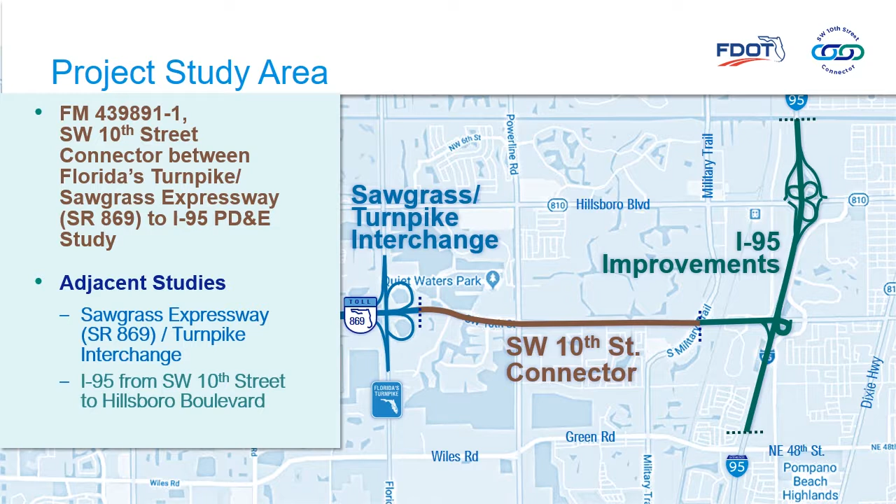The Southwest 10th Street Connector study is located between Florida's Turnpike and I-95. There are two adjacent studies that include I-95 from Southwest 10th Street to Hillsboro Boulevard and the Sawgrass Expressway and Turnpike interchange. The Broward Metropolitan Planning Organization, or MPO, formed a Community Oversight Advisory Team, or COAT, to provide recommendations for the project study area. Recommendations such as safety, improved operations, and environmental considerations have been incorporated into the project's purpose and needs statement, and all recommendations are being fully evaluated during the study.

The purpose and need for the Southwest 10th Street Connector is comprehensive and includes many of the COAT's recommendations. Providing a limited access managed lane connector facility along the corridor between the Sawgrass Expressway and I-95 will improve system connectivity between Strategic Intermodal System, or SIS, facilities. I-95, Florida's Turnpike, and Southwest 10th Street are all SIS facilities. SIS facilities are those that are critical to statewide mobility and economic development.

Local transportation needs for Southwest 10th Street will be addressed, including the application of complete streets concepts. Safety and operational issues will also be addressed along the corridor and will improve emergency response and evacuation times, since I-95, Southwest 10th Street, and Florida's Turnpike are all designated evacuation routes. This project will also encourage intermodal relationships and economic development for the area. Next is a short video about the Southwest 10th Street Connector.

I've lived in Deerfield Beach for 15 years. Feels like nice Florida. Great beaches, great food, great atmosphere. It's easy to get to Miami, it's easy to get to West Palm Beach. Everything we could think of is located conveniently within the city. We love it here, and we wouldn't consider living anywhere else. But the traffic on Southwest 10th Street has always been a bit of a challenge, and more recently we've noticed more traffic in non-peak hours.

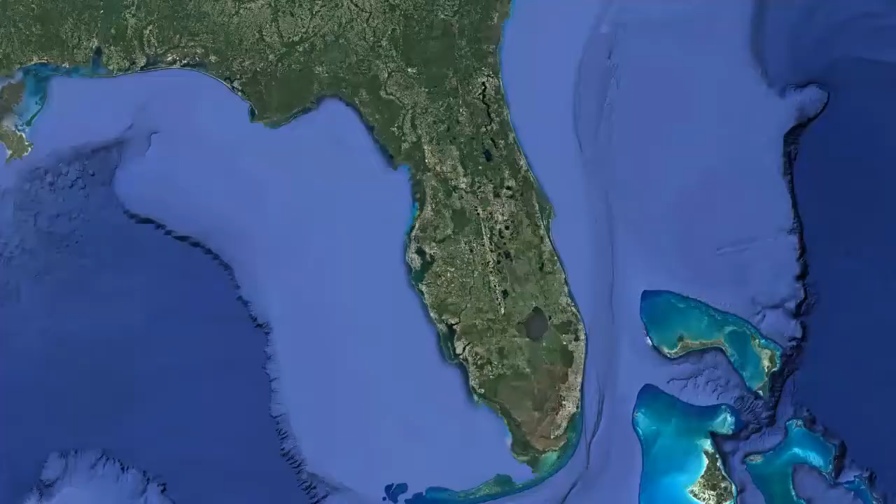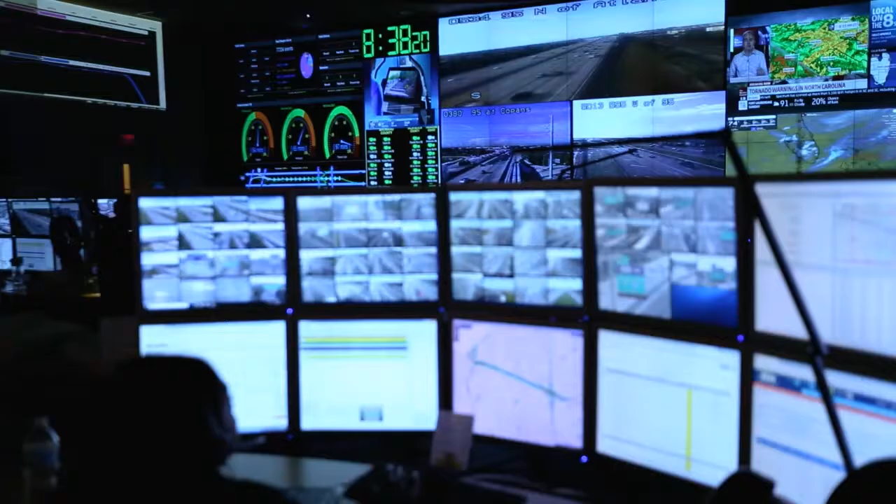The goal with Southwest 10th Street is to improve the connection to I-95, as well as provide a regional connection through a managed lane system to the Turnpike and the Sawgrass. In addition to those improvements, we will provide a new complete street local facility, which will provide bicycle, pedestrian, as well as vehicular mobility. Improvements to the corridor would allow us to actively monitor the roadway to be able to communicate with first responders and to let them know what is needed, and we can send the proper resources out to mitigate incidents that occur.

By providing the managed lane system, we are significantly reducing the number of vehicles using the local Southwest 10th Street, which will reduce the travel time for those who are using the local facility, provide you a quicker time to get to your home and or business that you're visiting. If we want to keep growing and sustain that growth, we need to plan down the road and allow for this growth to happen. The connector will help our area as well in the fact that now people won't avoid 10th Street for fear of the traffic.

The end result will better my commute and better my experience with the road. 10th Street will now be a connector that people can get on and go to our local businesses and actually not have to worry about being stuck in traffic. Helping the local neighborhood and local residents, that is something to be excited about. It's a great opportunity for us to take advantage of working with our partners to solve our congestion problems today and into the future.

The Southwest 10th Street corridor represents a gap in the regional managed lanes network. This corridor is an important SIS link between the Turnpike and I-95. The Turnpike and I-95 are the backbones to the north-south movement for people and goods throughout the state of Florida.

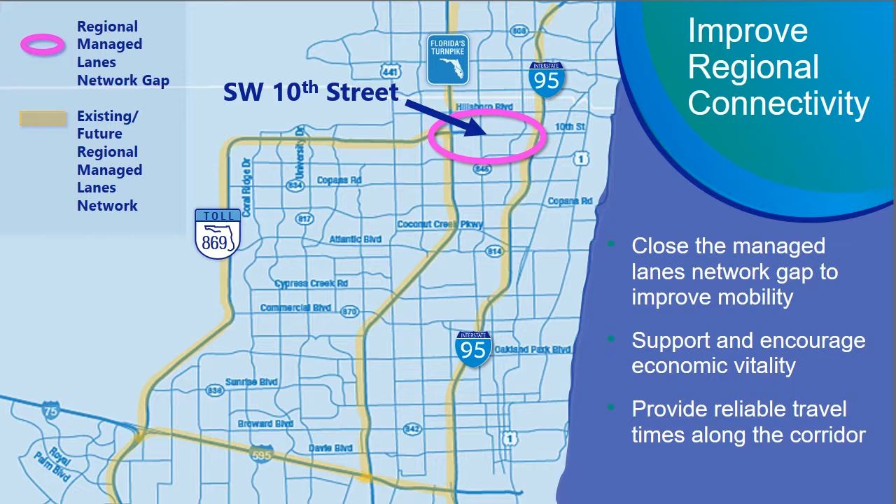Implementation of a managed lanes connector roadway, along with an improved local roadway for Southwest 10th Street, addresses COAT recommendations and will complete the regional network and promote mobility and economic vitality of the area. An improved local Southwest 10th Street will retain access to communities and businesses. Complete Streets elements will be incorporated in the design of the local roadway, including bicycle and pedestrian features, a lower speed, and landscape aesthetics features.

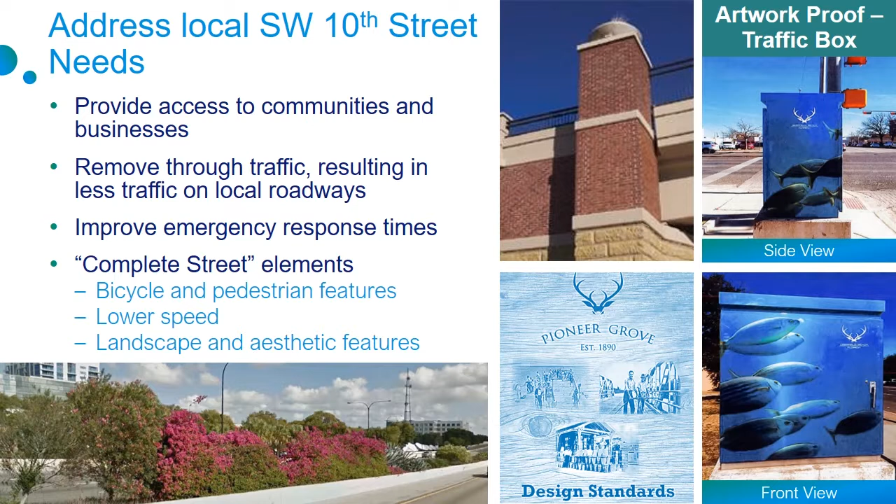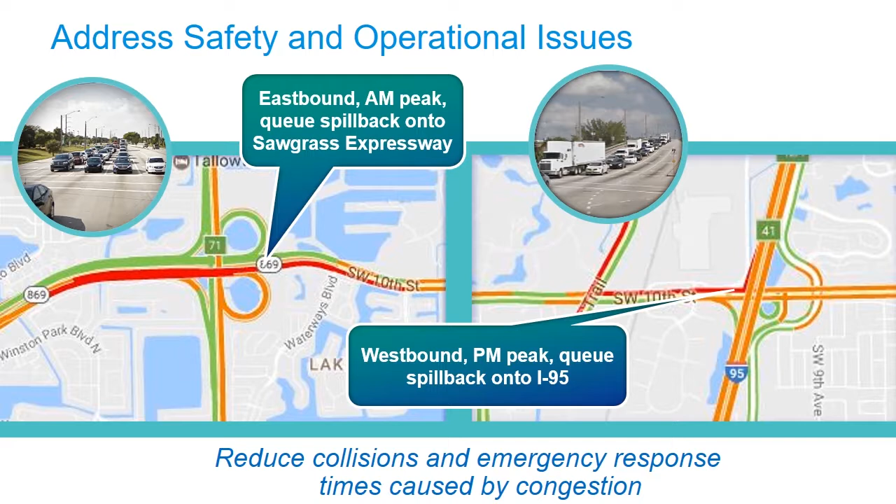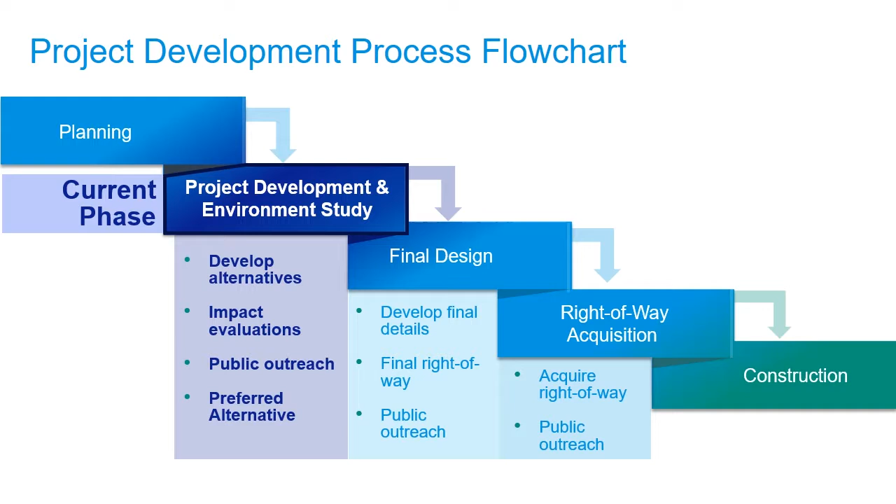Both the Southwest 10th Street and I-95 corridors experience heavy congestion, which contributes to a higher than normal crash rate, as well as delayed emergency response times. The overall transportation project development process is shown here. We're in the PD&E phase shown in the second tier. In the PD&E phase, engineering design alternatives are being developed. Community outreach and agency coordination are occurring along with evaluations of environmental and community impacts. At the end of the PD&E process, the FDOT will recommend a preferred alternative.

The PD&E process follows several steps. We're currently conducting the engineering and environmental analyses, holding the alternatives public workshop, and preparing draft documents. During the engineering analyses, alternatives are developed to meet the purpose and need of the project. Potential impacts to the corridor's social, natural, and physical environments are being studied and documented. A continuous community outreach process is integrated into every step of the process to ensure that residents, businesses, and other stakeholders have opportunities for participation and meaningful input throughout the PD&E study.

All design alternatives have been developed and refined throughout the study process to meet the project's purpose and need and avoid or minimize impacts to the community, natural, and physical environments while incorporating as many COAT recommendations as possible. The alternatives are being compared to each other in an evaluation matrix using common criteria such as community and environmental impacts, traffic operations, and others to determine which alternative has the least impacts overall while providing the most long-term benefits for the stakeholders. As part of any PD&E study, a no-build alternative is always carried forward and included in the matrix. The matrix is included in the project exhibits.

The team is evaluating 2 facilities within the Southwest 10th Street corridor. One will be a managed lane facility to provide a connection between the Turnpike, Sawgrass Expressway, and I-95. Concepts will be evaluated with different entrance and exit ramp locations between Powerline Road and Military Trail for access to and from the managed lanes and local Southwest 10th Street. The extent of the below-grade section is being evaluated for the managed lane facility and will continue to be developed as the study progresses. The other facility will be a local, lower-speed roadway to serve businesses and communities within the corridor. Bicycle lanes, sidewalks, and other community elements will be included.

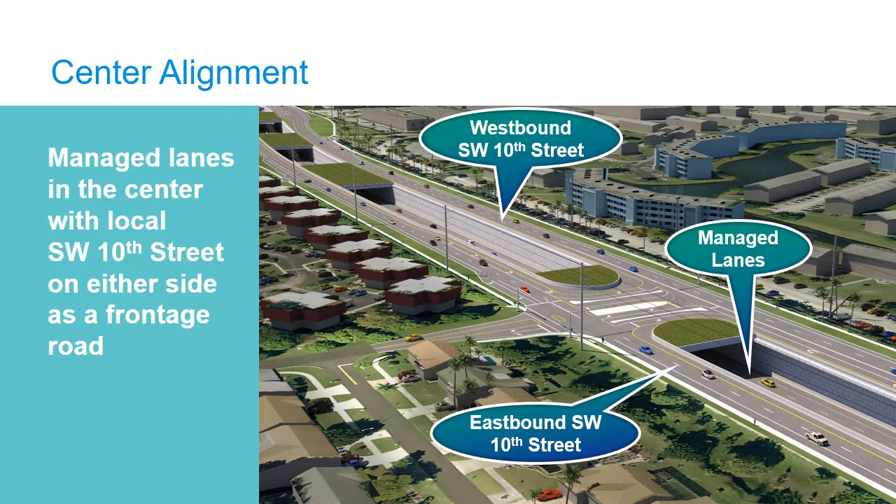In April of this year, the first Alternatives Public Workshop was held. A center alignment and a north alignment were presented. The center alignment presented in April is shown here. The managed lanes are in the center, with the local Southwest 10th Street on either side as a frontage road. This is the north alignment, which places the local lanes in the north side of the corridor and the managed lanes in the south. Based on feedback from the April Alternatives Public Workshop, community and stakeholder meetings, the north alignment was favored.

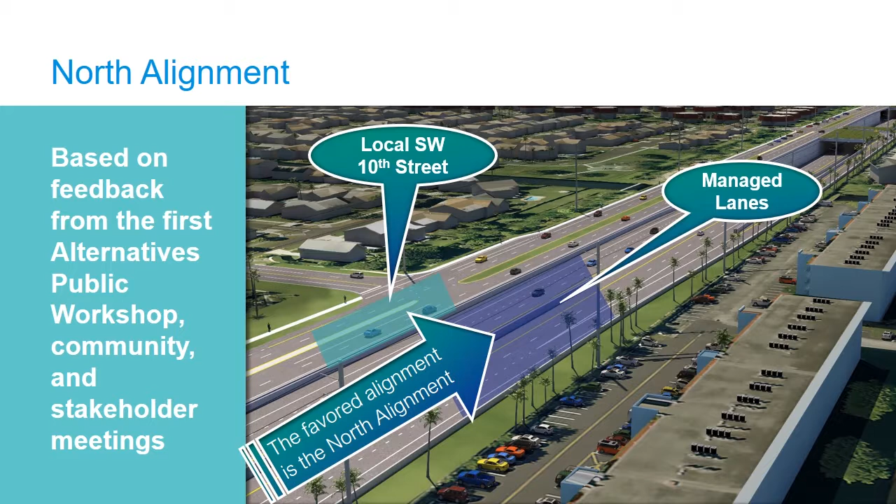Based on feedback from the previous Alternatives Public Workshop, other alternatives are being evaluated. In particular, a series of partial depressed options, which reduce the length of the below-grade section, are being examined, as well as a non-depressed option. The full depressed alternative has unique concerns, including construction impacts, drainage issues, and fiscal considerations.

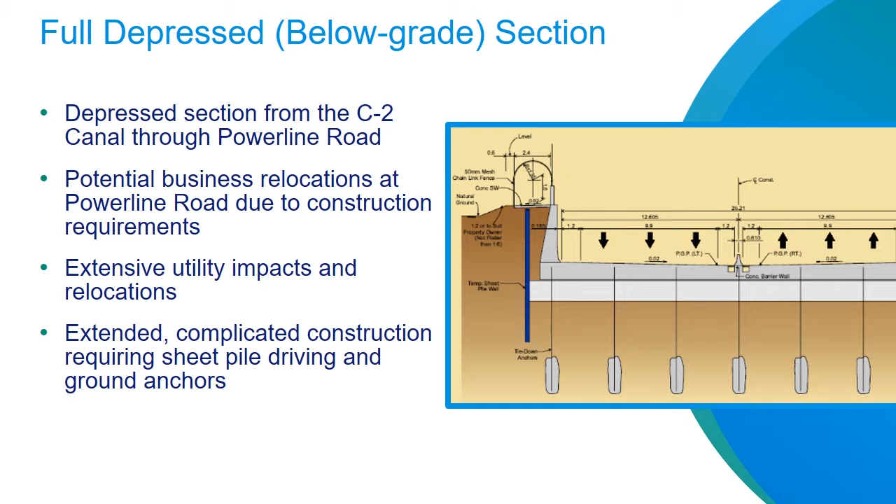With a depressed or below-grade section, there are potential impacts at Powerline Road due to construction requirements. Extensive utility impacts and extended and complicated construction, including dewatering and ground anchors, are required with this option. The limits of the fully depressed option would have an impact to Quiet Waters Park, while pump stations would be necessary for any depressed options. Noise barriers would also be warranted for a depressed section.

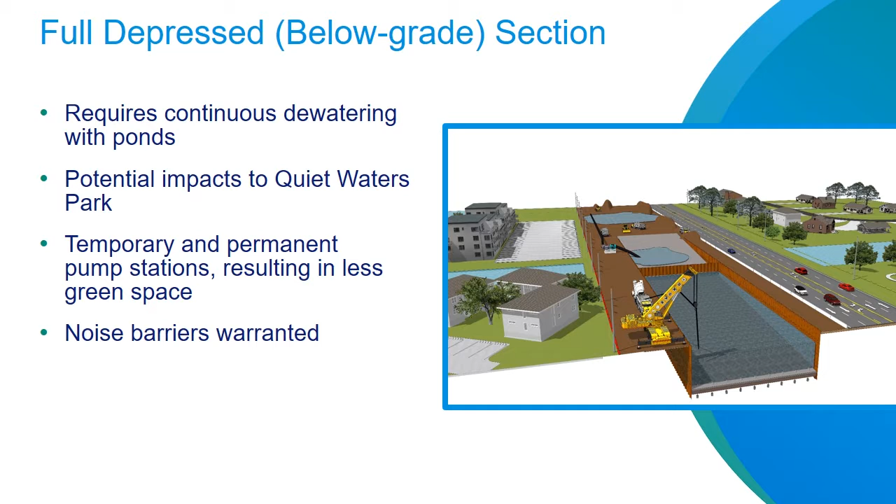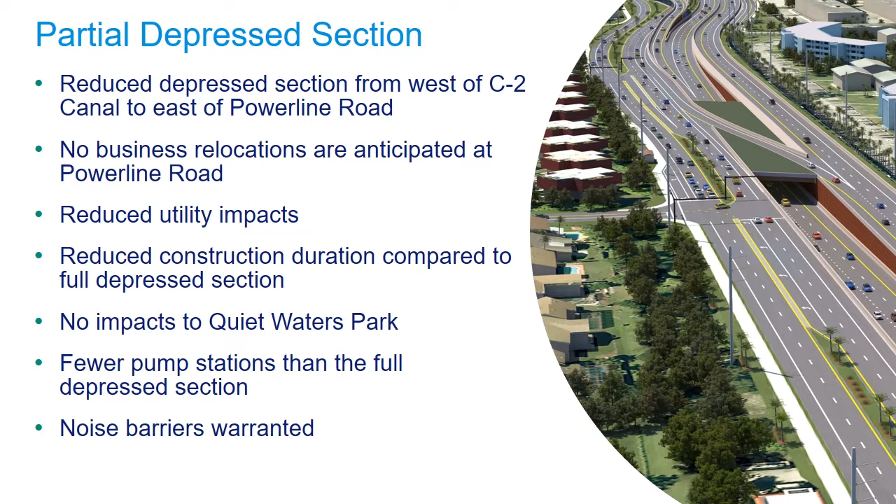With the partial depressed section, the managed lanes are depressed from west of the C2 Canal to east of Powerline Road. There would be no business relocations anticipated at Powerline Road, and utility impacts are reduced. The construction duration and number of pump stations are reduced compared to a full depressed section. There would be no impacts to Quiet Waters Park, and noise barriers would be warranted. With the non-depressed section, the managed lanes are at the same level as the local Southwest 10th Street lanes, and there would be no business relocations anticipated at Powerline Road.

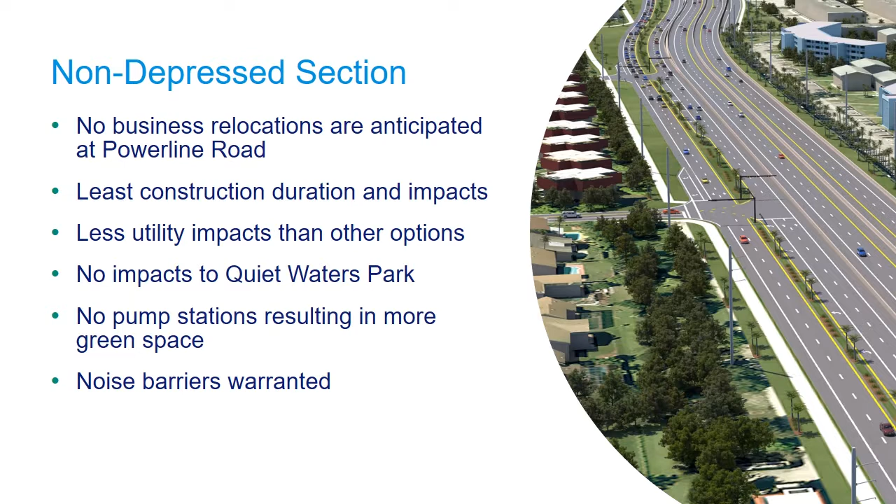This alternative has the shortest construction duration as well as the least utility impacts compared to the depressed alternatives. Also, there would be no impacts to Quiet Waters Park, but noise barriers would still be warranted. Features of the local lanes for Southwest 10th Street include two 11-foot lanes in each direction, separated by a median. 7-foot buffered bicycle lanes will be included, as well as a sidewalk on the south side of the roadway. This local roadway will be physically separated from the managed lanes.

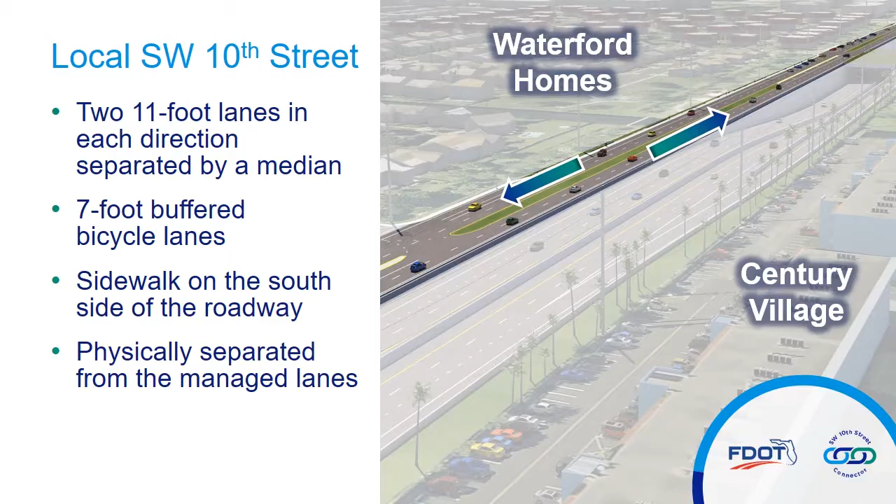Features of the managed lanes include two 12-foot lanes in each direction, separated by a median barrier wall. 12-foot shoulders will be provided. The managed lane system will be physically separated from the local Southwest 10th Street roadway. Limits of the below-grade section, as well as entrance and exit ramps to the facility, continue to be evaluated. Per state policy, no trucks over 2 axles will be allowed to use the managed lanes facility. 3 options are presented today: a depressed alternative, a partial depressed alternative, and a non-depressed or at-grade alternative.

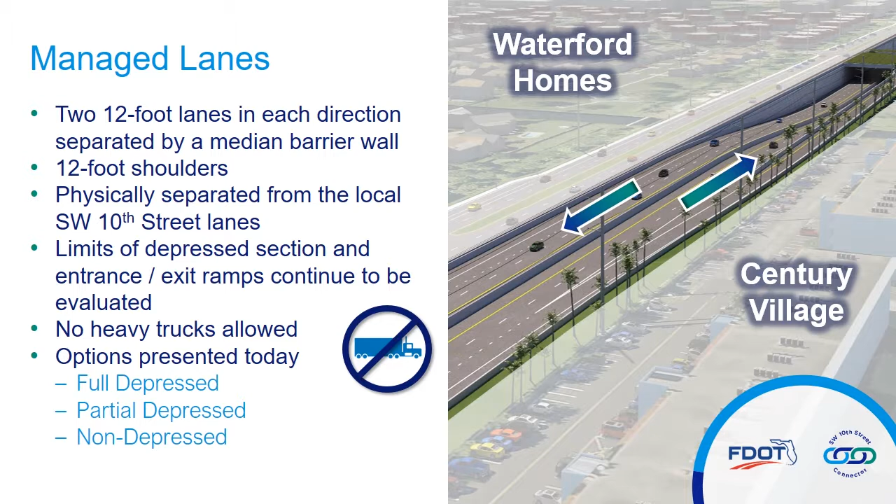As with all PD&E studies, FDOT will consider the no-build alternative throughout the PD&E study. With the no-build alternative, no improvements will be made to local Southwest 10th Street and no managed lanes will be constructed. While this alternative requires no expenditure of roadway funds, requires no right-of-way, and has no construction impacts, the no-build alternative will allow traffic conditions to worsen, increasing congestion, time delay, emergency response times, and fuel consumption. Noise levels will increase and air quality will decrease. Next, let's compare the operations of the build and no-build alternatives.

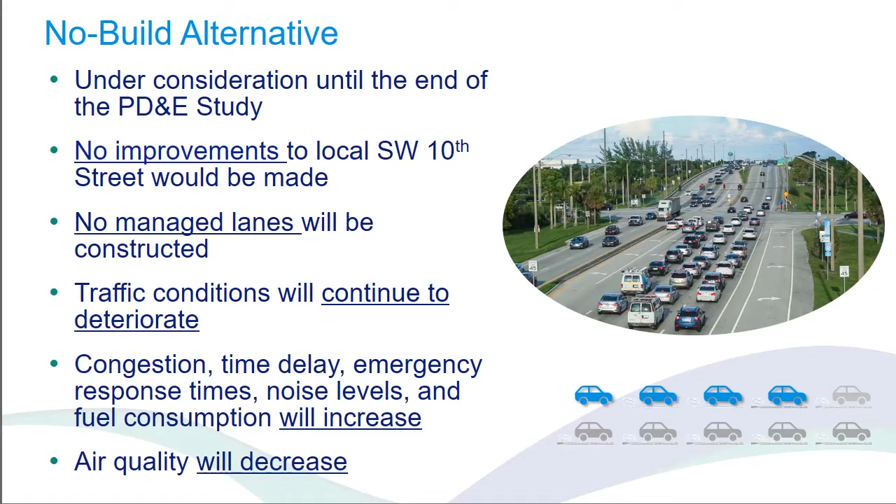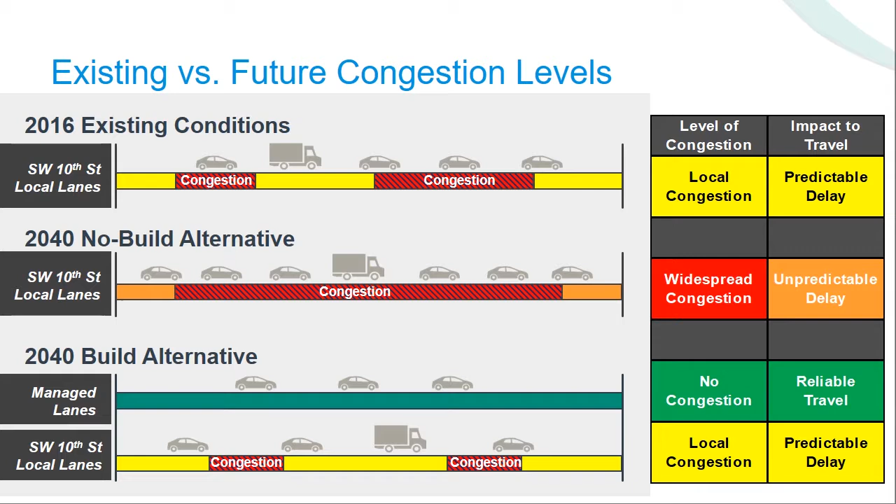Today's traffic and congestion is shown in the top graphic, which indicates local congestion but predictable delay. If no improvements are made, congestion will continue to increase as illustrated in the 2040 no-build alternative, which shows widespread congestion and unpredictable delay. The 2040 build alternative graphic illustrates the congestion levels for the managed lanes and the local lanes as forecasted to the year 2040. Note that this final graphic separates the local and managed lanes as designed in the build alternatives and operates with predictable but reliable travel times along the corridor.

In terms of traffic congestion, the 2040 build alternative provides significantly better traffic operations than the no-build alternative. By removing through traffic from local Southwest 10th Street and offering motorists a managed lane choice, east and west travel times are reduced. A significant improvement is the 40% reduction in intersection delay, as 40% of all traffic will be in the managed lanes. These improvements also result in reduced emergency response times.

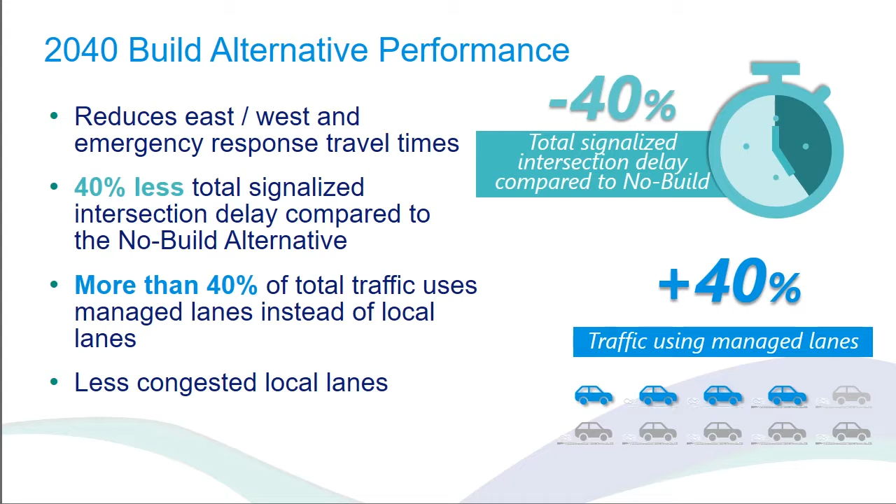This rendering is looking towards the west and shows the non-depressed alternative with no ramps to or from the managed lanes. The north alignment features an elevated section carrying the managed lanes over Military Trail and a ramp conveying eastbound traffic exiting to local Southwest 10th Street. This configuration is necessary due to the proximity of the railroad tracks, which Southwest 10th Street must go over as it exists today.

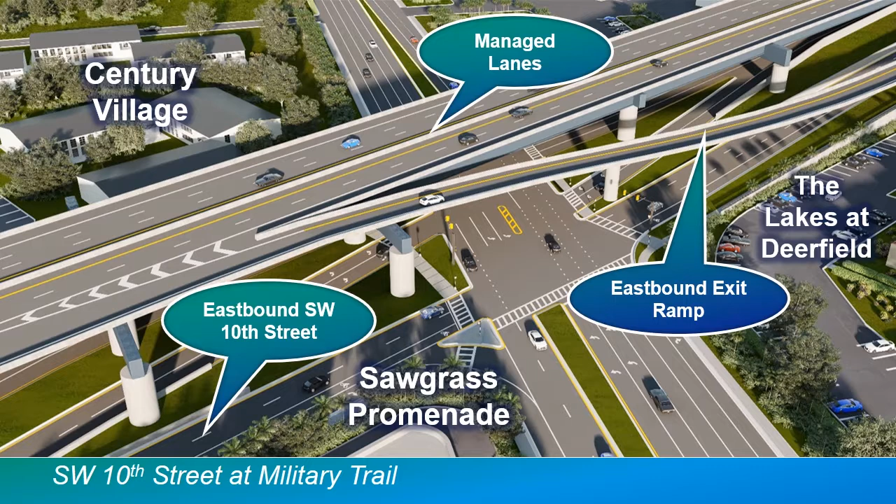Currently being evaluated are the locations of the entrance and exit ramps to and from the managed lanes to local Southwest 10th Street. An eastbound entrance is planned for east of Powerline Road and an eastbound exit east of Military Trail. A westbound entrance is planned for east of Military Trail and an exit ramp west of Military Trail.

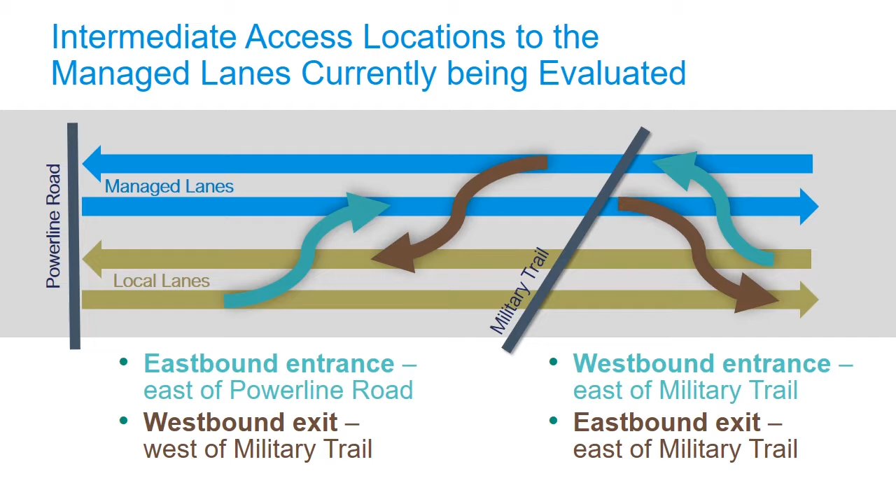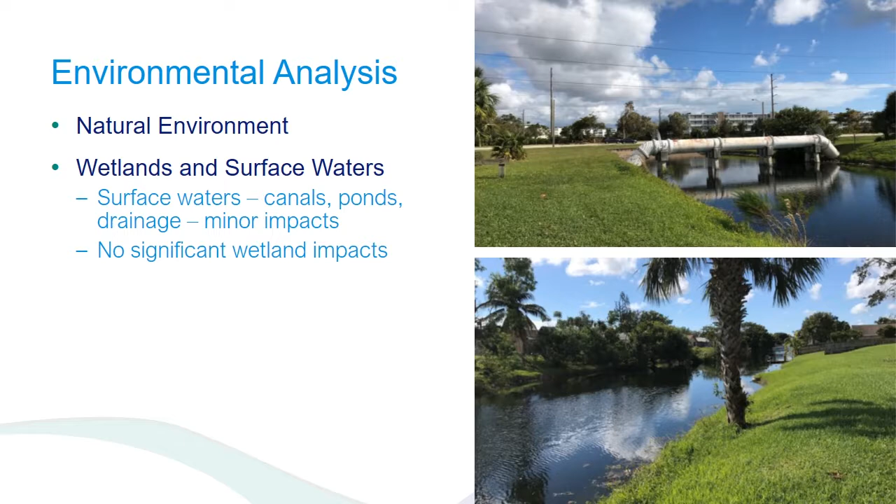For the Southwest 10th Street connector improvements, each build alternative is evaluating the natural, physical, cultural, and social environments with a goal to avoid or minimize impacts to these resources. No wetland impacts and only minor impacts to surface waters are anticipated. No adverse effects to endangered or threatened species are anticipated. A bald eagle nest is located in the Turnpike interchange area, although no adverse effects are anticipated. Results of the environmental analyses have been documented in the Natural Resource Evaluation.

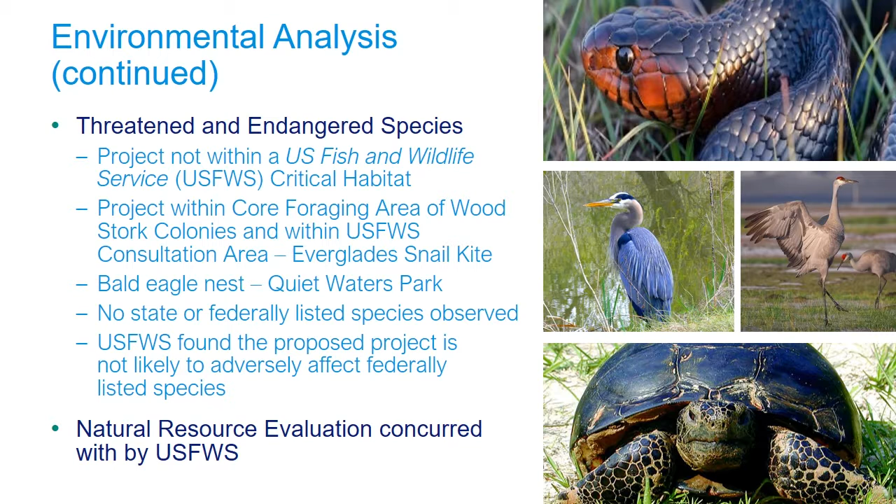A sociocultural effects evaluation is ongoing, and a cultural resource assessment survey has been prepared to evaluate the effects to historic and archaeological resources. Preliminary evaluation indicates no adverse effects. There are 2 resources protected under Section 4(f) of the U.S. Department of Transportation Act, Crystal Heights Park North and Quiet Waters Park. No permanent impacts to these parks are anticipated, but temporary impacts may occur depending on the alternative chosen. Coordination is ongoing with Deerfield Beach and Broward County regarding the park resources.

Multimodal accommodations are being incorporated into the project improvements, which include sidewalks, bicycle lanes, and the encouragement of transit routes. A contamination screening evaluation has taken place. 23 contamination sites have been identified, however, no significant impacts are anticipated. A contamination screening report has been prepared, and an air quality screening is also being prepared.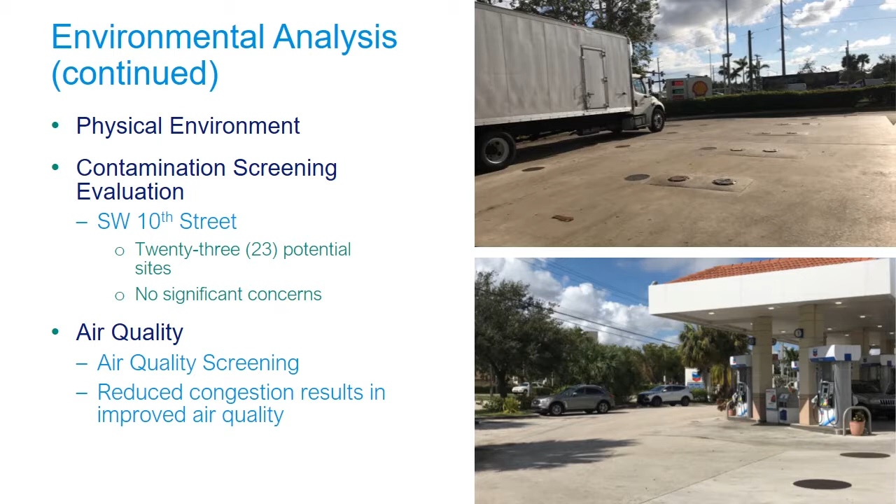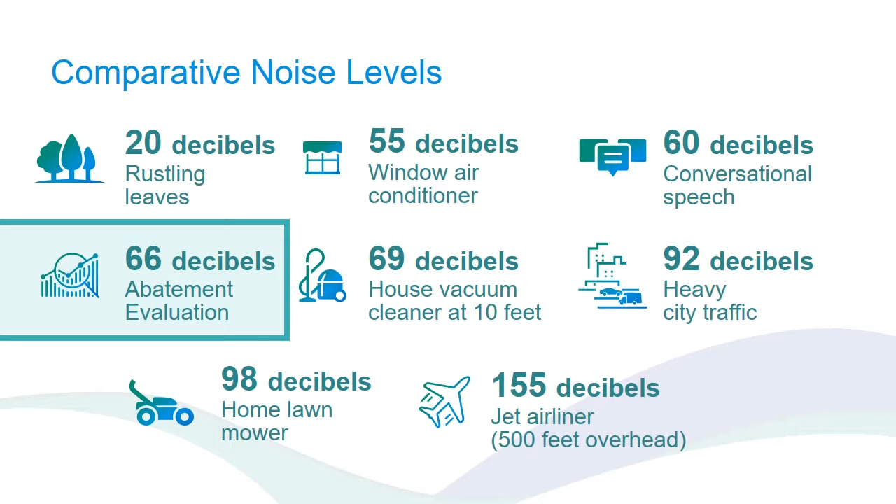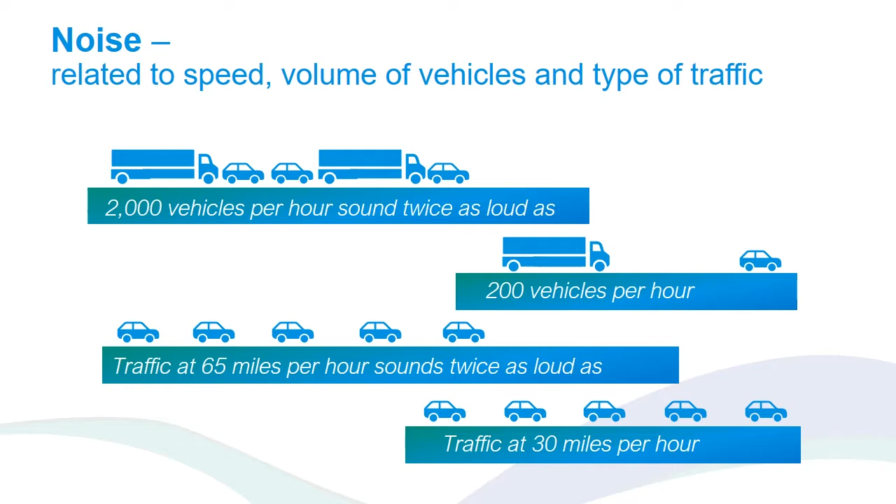These are some comparative noise levels to associate decibel levels with everyday sounds. Noise impacts are considered at or above 66 decibels. Perception of noise is related to the speed and volume of vehicles, as well as the type of traffic. For instance, 2,000 vehicles per hour sounds twice as loud as 200 vehicles per hour. Traffic traveling at 65 miles an hour sounds twice as loud as traffic traveling 30 miles an hour.

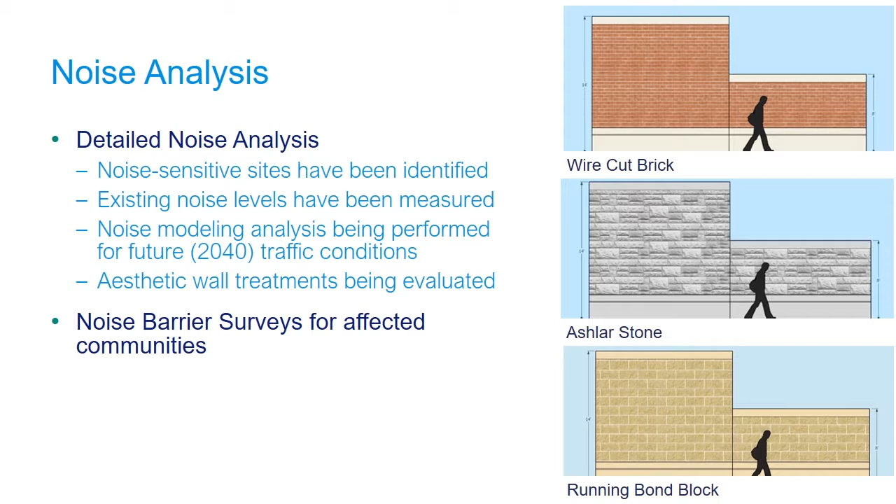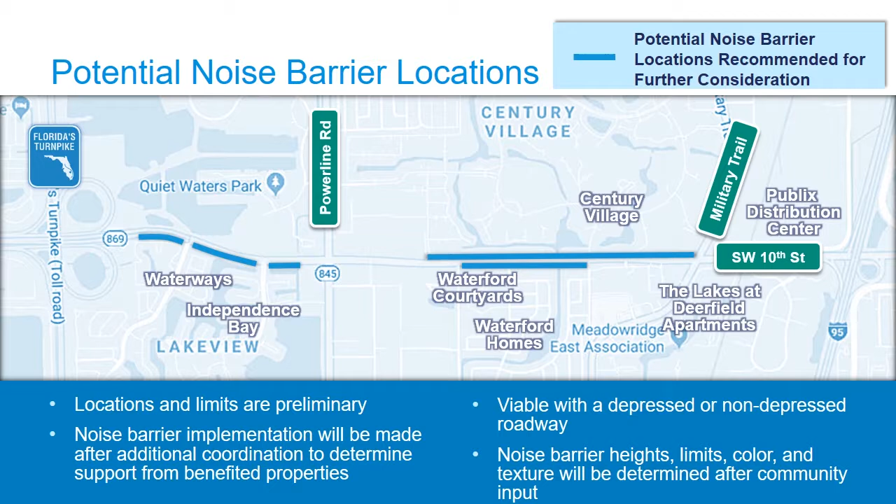Noise is a key concern for the communities surrounding the corridor. Noise levels have been measured at various locations along the corridor, and an analysis is ongoing for each of the concepts. Noise walls, if required, will be closely coordinated with affected stakeholders. Potential noise barrier locations have been identified and are shown in this slide in blue. These locations need to be further analyzed, and the limits shown are preliminary. These preliminary results are viable with an at-grade or depressed roadway alternative. Noise barrier recommendations will be made after additional coordination to determine support from benefited properties.

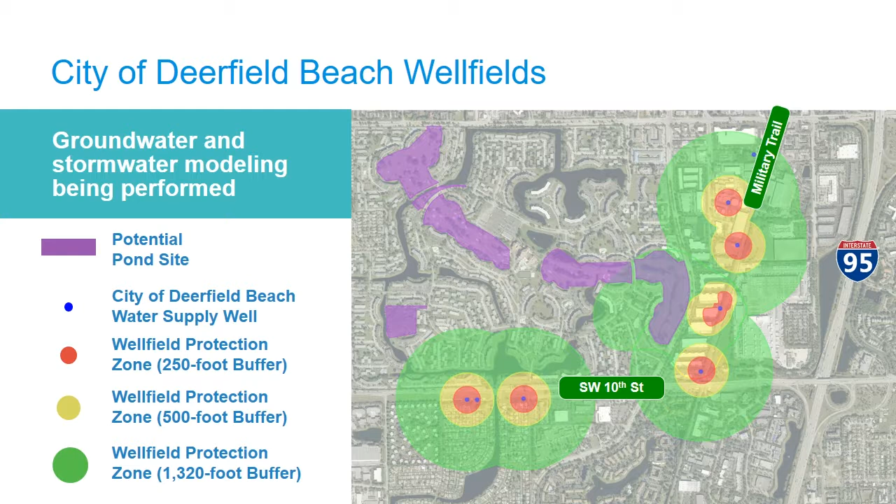Water supply wells for the city of Deerfield Beach are located within the corridor. In order to assess the impacts of a proposed depressed section on the wellfields, groundwater modeling is being performed. As you can see from this graphic, the wellfield protection zones extend into the project areas and are a very important consideration. The FDOT has planned and funded 2 future landscape projects to address landscape and aesthetic elements along the corridor for installation after construction of the roadway improvements. As the PD&E alternatives are developed, landscape design concepts will be developed and coordinated with the city.

As we move forward, alternatives will continue to be developed and refined. Public outreach is continuous throughout the study, and interested groups are encouraged to contact the project team, who are available for group meetings. The team looks forward to meaningful stakeholder engagement and welcomes all input. The workshop today represents an additional opportunity for you to provide your input and feedback to the team on the engineering concepts being developed. The public hearing, anticipated in the spring of 2019, is another meeting where you can provide your comments.